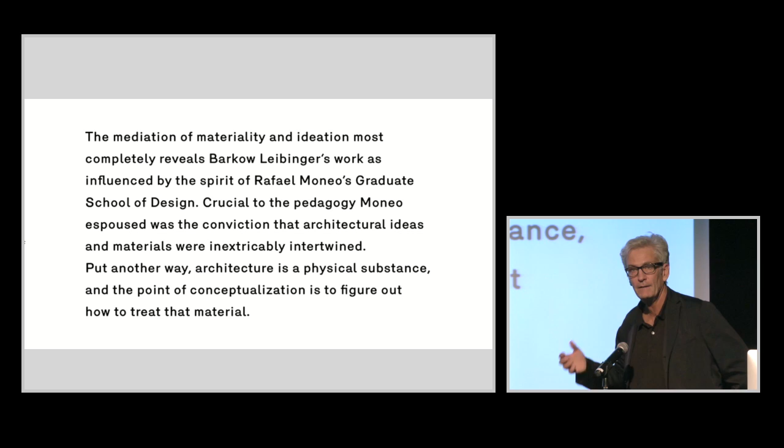One work area that Eric just mentioned was this idea of fabrication research, which we set up in the practice. It's an idea of materiality, but also an idea of the kind of components on our buildings that we develop ourselves. We don't really work with the building catalog so much — we build our own kinds of work areas or materials.

This idea of material, it's really not like a mantra in the office, but it was at the beginning, after coming out of graduate school with Regine at about the same time, a way of setting up the practice — a series of interests or concerns that helped us do that. So we were very interested in tools, how you can use tools.

You can use high-tech tools like this, or you can use a hammer. It really doesn't matter. It wasn't going to be like parametric design is going to take over the world or save the world. You can look at different kinds of tools and figure out how to use them.

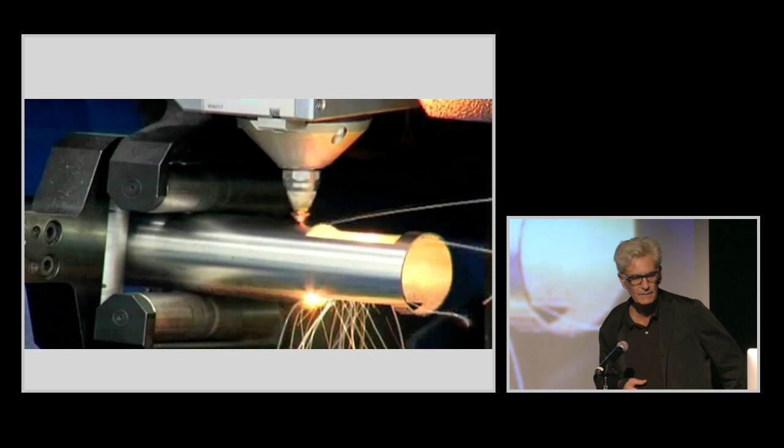Also looking at materials — when we came to Germany in the early 90s, a lot of our first projects were factories. We worked for industry, doing factories all over southern Germany. While working for these kinds of clients, we started to find out about their technologies, and became very keen on the idea of using their technologies for producing projects.

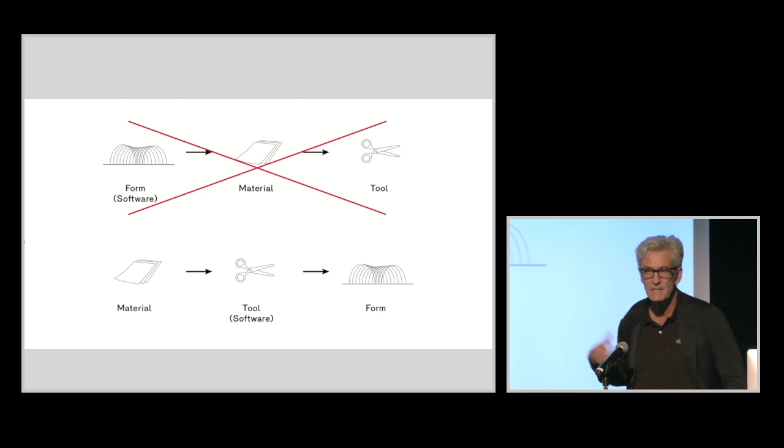When we were at school, the diagram on top might illustrate starting to use software to make forms, then thinking about materials somewhere down the line, and how you might transform the material through tooling. The way we'd like to work ideally in the office is almost the opposite — you take materials, you look at tools, software controlling those tools often, and what kind of spatial or formal outcome that might produce.

So a diagram like this could illustrate that idea of using tools and materials to produce again a kind of architectural outcome.

At the same time, we started collecting partners in industry in Europe specific to different kinds of materials, who were very keen or willing to work with us up front in terms of developing new ideas. Some of them are obvious partners from the building industries. Some, like BMW, are outside or parallel companies that would help us do these kinds of projects.

We also started making our own books, which you can do too — you probably do in school. We started making very quick, very cheap, almost like manuals to collect some of these ideas as process, not so much documenting single buildings we were doing, but talking about processes. Before we did the monograph this year, we did a number of these for the Architectural Association in London, cataloging these things.

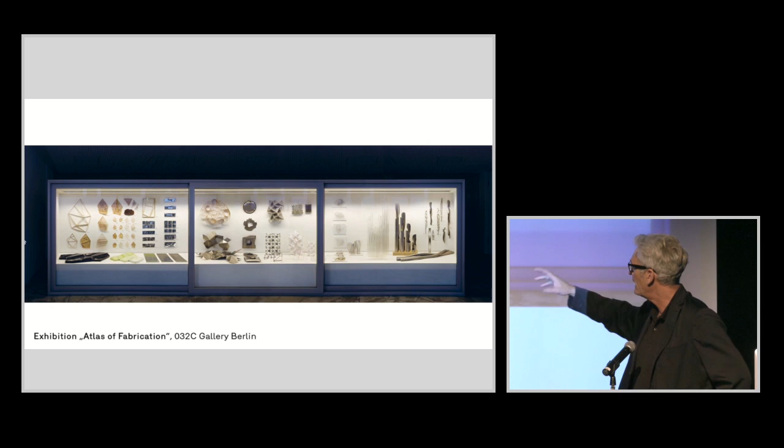We started making our own kinds of folios where we could collect different kinds of books and ideas, and distribute them within the office, as well as through the school. We also did exhibitions, almost like a kind of natural science exhibition, collecting different materials, some at different scales, some at the scale of 1 to 1, but really in a physical way, showing them again as kinds of collections.

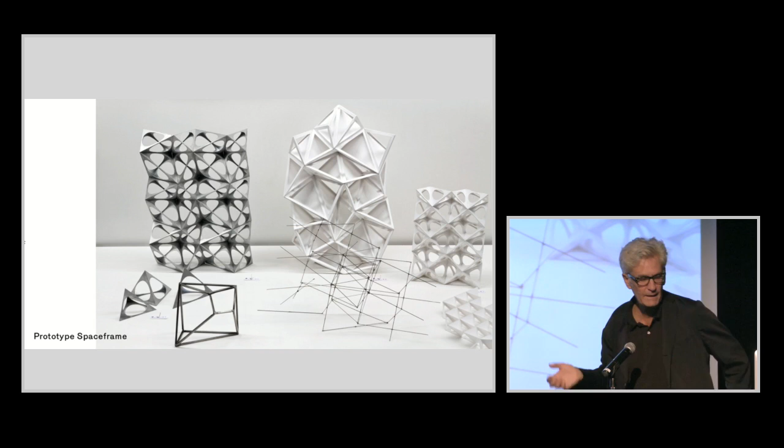We had this idea of an archive in our practice, using materials and ideas which you can add to, use or not use, almost like a library of different ideas. Some of these had a kind of history, like our interest in the history of space frames, how you could think about these digitally and produce these projects, then deploy them in our own architectural work.

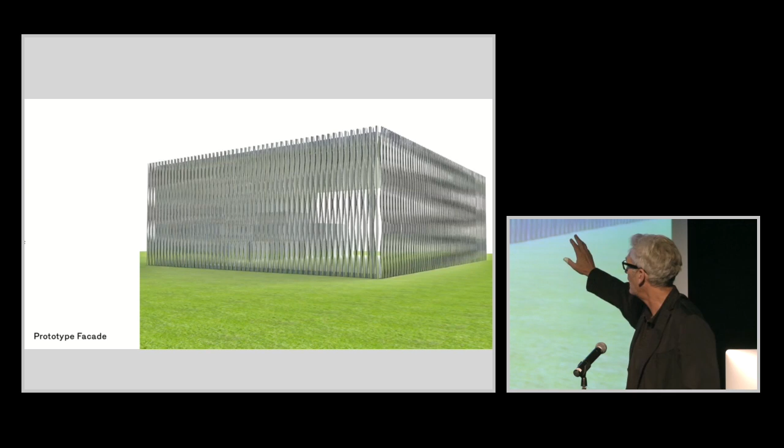We would send students down to the factories to find out about the economics, the speeds, the kinds of materials you could use. In a naive way we would just produce these things and cut them, thinking about an architectural application. We produced an array of laser cut tubes for an exhibition in Basel, Switzerland, which became an idea for a facade that could simply and kinetically turn these tubes to produce a formal, aesthetic effect, but also a performative one.

By turning these tubes, the showrooms could be transparent so you could see what was inside, or turning them could provide sun screening and sun protection. This idea of sustainability isn't simply something you tack onto the building, but something integrated and essential to the architectural idea of the project.

Around this time we were also working with installations and exhibitions. Architectural exhibitions really became about working toward this - we produced installations that were like a product, but also an environment, in this case with laser cut tubes that were scripted, so you could make one cut and produce a kind of tangent topographical project, again as a quasi-architectural project we could find an application for later.

There was also an interest in historical projects and revisiting them. In this case, Konrad Wachsmann, who had a strong history in Berlin in the 30s working in timber construction, and his development of the space frame, in this case for hangar projects - thinking about what that project would mean today.

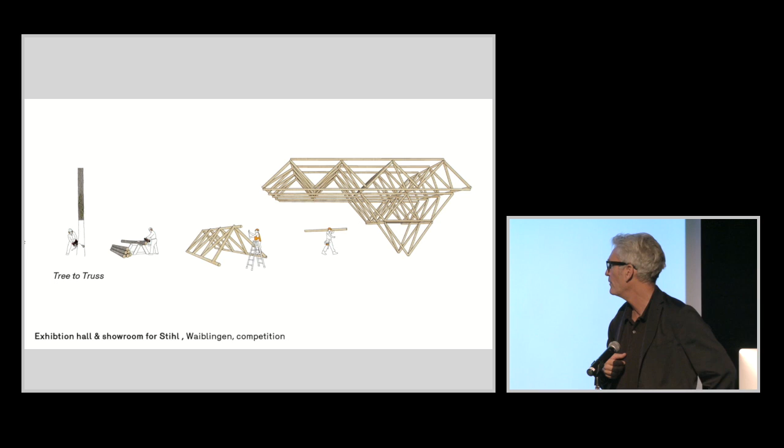We did a competition a few months ago for Stihl, a German company that makes chainsaws. They had their own forest, so they could harvest trees from it and cut them to produce trusses, which we could build into a large exhibition showroom for their products in this forest in southern Germany, next to an existing building for which we also designed a new facade.

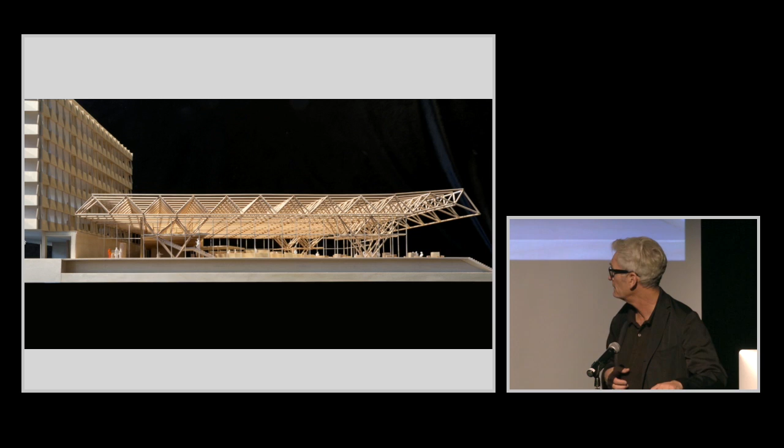We liked this idea of using the tools they produce, but then creating a Konrad Wachsmann-like space frame project in a really low-tech way, where you could literally cut these trees with a chainsaw and pin them together with bolts, constructing it very economically and quickly - producing a neutral, almost hangar-like space.

These kinds of projects were really close to the industrial projects we've been doing for the last 15 years, working for these Mittelstand, usually family-owned companies in southern Germany, to produce a project so simple in terms of detailing and process that you could almost build it yourself.

At the same time, this idea of tessellated structures and space frames informs a project still in process which we call Thicket. These are tiny structures made out of 2mm stainless steel wire that we just zip clip together.

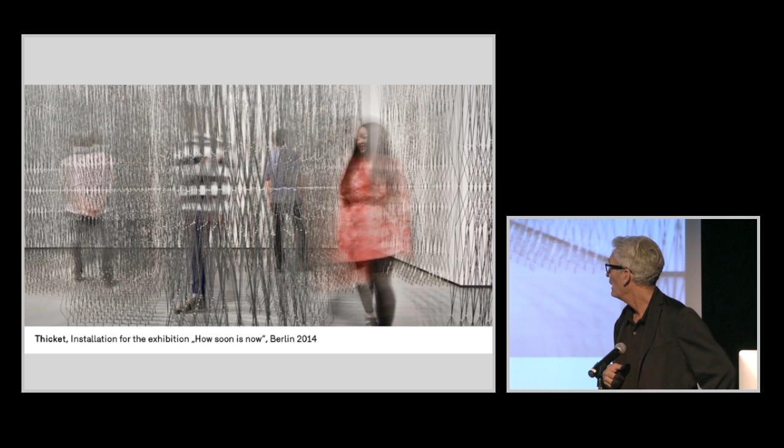The pieces were digitally bent by a company that usually makes things like coat hangers, to produce an almost labyrinth-like space, which we first showed in the exhibition How Soon Is Now, in Berlin.

We taught ourselves in a courtyard of our studios how to put these together. We made frames where you could assemble it, did some structural engineering calculations, and realized the project could take a roof of simple plywood. You could put it on the floor, almost like a domino-type diagram, as a kind of module.

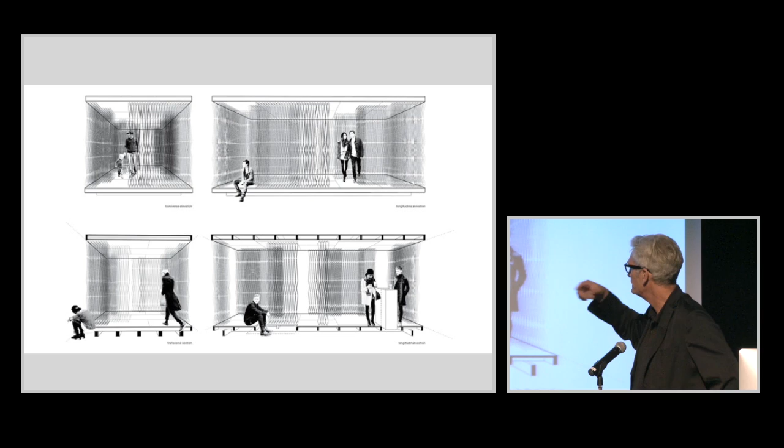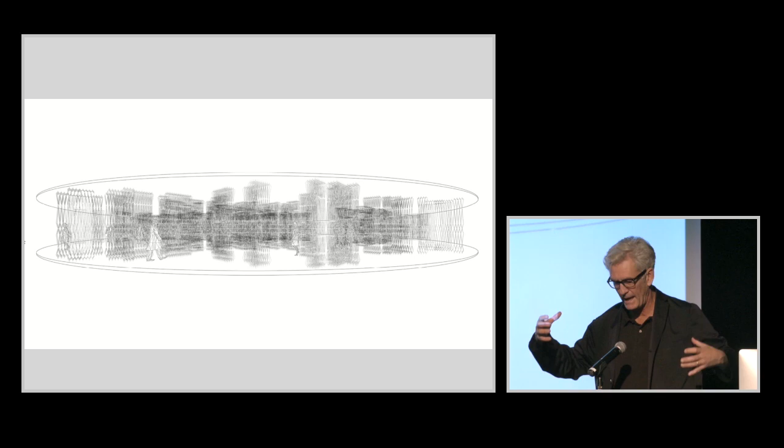The idea was that the structure itself would be almost completely dematerialized, like a blur. So if you put this pavilion in a landscape or park, you could see through it. The idea is that vertical structure, which is usually really heavy and physical, could be almost nothing, a blur-like structure that creates a kind of space. These are kind of think tank projects. There's no real client for a project like this, but we produce these things on our own initiative.

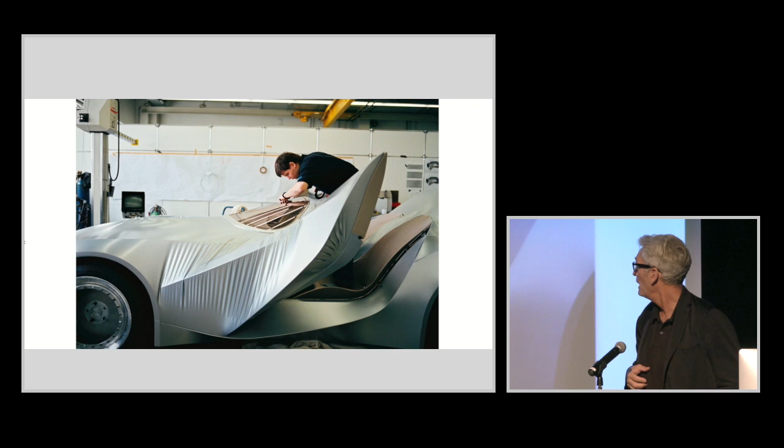Other projects are more collaborative, like the Gina project. We had won a competition for BMW in Munich for their design center. The project went on hold, but we kept working with Chris Bangle, who's American from Milwaukee and head of design at BMW. He had designed this really strange car called Gina, which has an elastic kinetic skin, so the car could change its shape, the doors, by folding apart instead of typical door mechanisms. We thought it was an okay idea for a car, but maybe even more interesting for architecture.

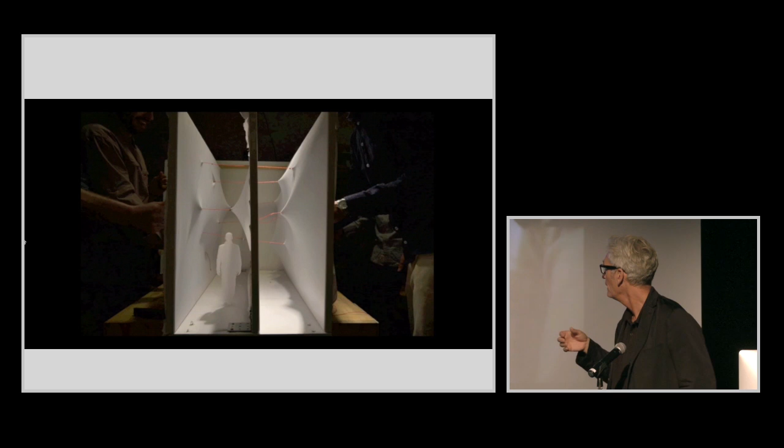Last year we did Rem Koolhaas's show on the elements of architecture in the Giardini in Venice. We did a wall - basically a kind of history of walls, from a very archaic stone wall, to a brick wall, acoustical partition, glass partition, to this kinetic wall project we did. We flew to Rotterdam to show Rem this sort of ridiculous film we made, almost like a puppet theater, of how it would work. Our interest and his interest was really how a kinetic surface could change the space between these layered walls, which was a very narrow space you could walk through. He really liked the idea, so we produced it in Venice.

This is Sejima kind of petting it, which is nice. It moved, and it also had a double layer of fabric that produced a kind of moire effect. You can see how it works spatially as a series of layers.

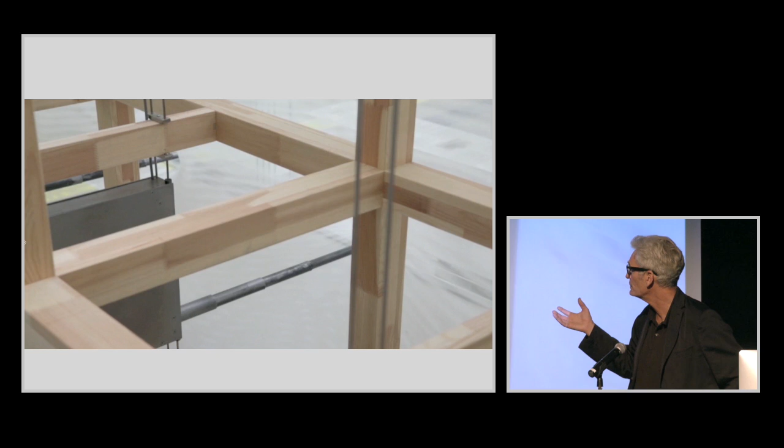It worked like this, so it was a little tongue-in-cheek really as an architectural idea. But we ran this as a studio at Harvard for lightweight housing, which was quite interesting, because you could have a kind of scaffolding structure - it could be metal or wood - and then a skin that was activated and changed. When we thought about this project programmatically, it was interesting that an idea of architecture could get smaller or bigger, could add, could be compact, with relatively little information or very little material.

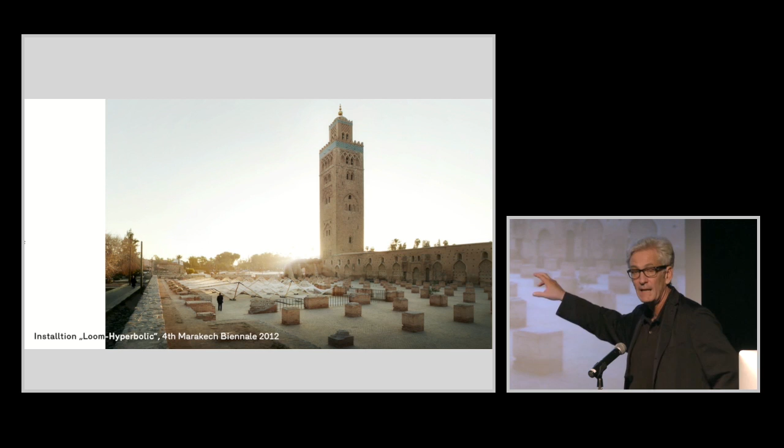A lot of these things we started to set up as prototypes rather than installations. This was an installation we did a couple years ago for Carson Chan in Marrakesh. Morocco has no museum of modern art, so the idea from Carson was to bring architecture and art into the public realm. We got this fantastic site at the Koutoubia Mosque in Marrakesh, where we could do a site-specific installation.

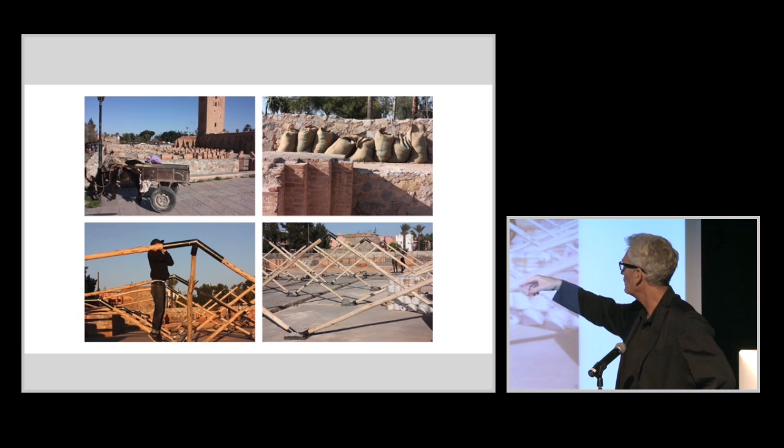The interesting thing was really translating this from a kind of digital world in Berlin to very much a craftsmanship world in Marrakesh. We brought all the material to the site with donkeys in these carts, and then had local fabricators make the metal connections and the wood for it, which let us do the whole project in two weeks.

Mohammed was the head of our construction team, and he had a lot of experience in traditional weaving techniques, knot tying and stuff. He was able to calibrate the project, tell us how long to do it, how we would do it—in a sense, interpreting the drawings and models that we brought on site.

So we were able to produce this project, which had, for us, an interesting material effect as a kind of test. It was very light in how it covered, how it worked in terms of shadow, and the light's very intense sun there. It fit within this 5 meter by 5 meter grid of the site, this abandoned, ruined site. It had a certain effect at night in terms of light and air.

Again, the idea of it as a site-specific installation, but we kept thinking about how this might translate to, say, an industrial architecture or at a different scale.

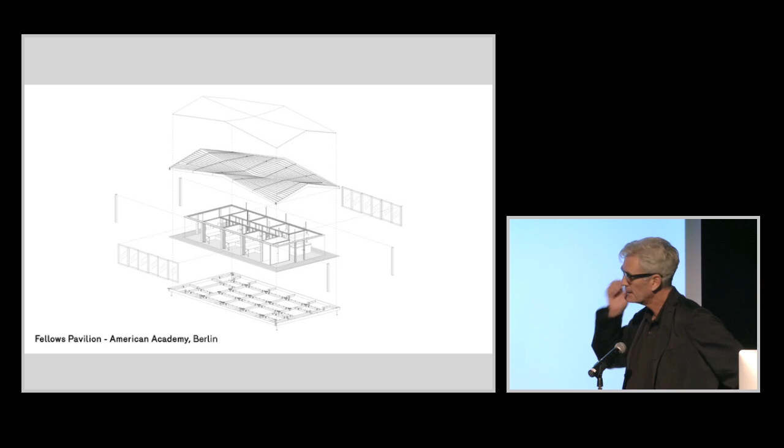In a way, that project informed this Fellows Pavilion, which we just finished a few months ago at the American Academy in Berlin, which used this idea of a hyperbolic roof—now not in string, but in steel—for these study carrels for the fellows, the scholars who come and work there.

The idea was to try to translate that kind of roof, or that form making, into a roof like this for the pavilion, which is quite simple. The plan has 7 study places, and in section this kind of insulated hyperbolic roof sits lightly above the ground on this platform.

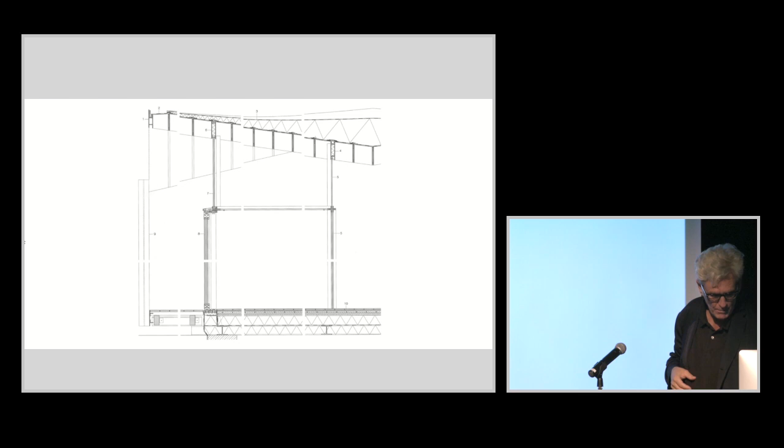We really got into the detailing of it—the glazing system, and then a series of prefabricated metal cassettes that fit together and could be insulated in a structure we could build quickly to produce these kinds of spaces, which can be very social, very open, or can curtain off and be private if you need more concentrated work within these kinds of spaces.

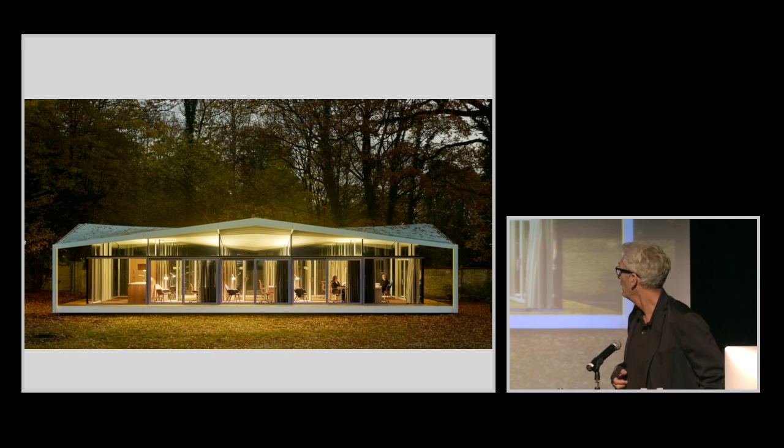It had a smaller garden site against the neighbor's wall versus a much more open garden side. These are former teachers of ours—Mark Wigley, Beatrice Colomina—came as the first scholars to work there. It was kind of nice to have your former teacher-critics occupying your building for the first time.

That again had roots to some of our industrial work, but the idea was to do a fairly highly experimental building for us at that scale and in that kind of context on the Wannsee. That's Beatrice modeling for us.

Another work area has been this idea of facade making. In a country like Berlin, there's a lot of industry focused on facades, new facade making—again, this idea of having a formal idea about a facade, but also the kind of performative, particularly with sustainability. How does it control energy? How does it control light and shadow, ventilation?

So it almost became, at some point, a kind of site within a site—this idea of a liminal space as a kind of mediator between our projects, which usually have a very public exterior and a very private interior. There were a number of projects coming out of the office at this time where that became the defining moment in the architectural project.

For example, the Gewandhaus in Dresden was a site for a new building for galleries, bistros, and offices. Dresden, as you know from history, was this beautiful Baroque sandstone city that was heavily damaged during World War II. In researching that project, there was never really any building done on that site since.

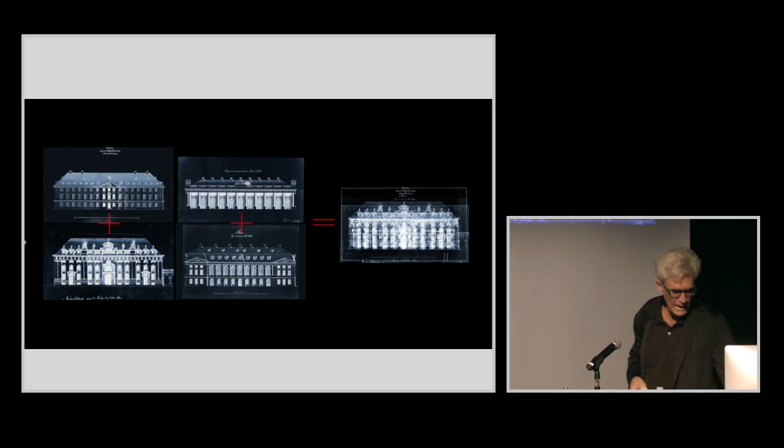It wasn't really an empty site through destruction—we looked at a series of buildings that were proposed for the site, and then we morphed them together to produce a form for the project. Then we went around Dresden mapping the surfaces of the Baroque architecture, which allowed us to produce an idea for a series of templates that we could stack and produce as the facade of the building, which could be in stone—the same stone, or it could be glass or concrete.

The idea was to produce almost a kind of historically accurate massing, but then with this kind of striated form that could be completely opaque, or completely translucent or transparent, depending on the time of day or how you would look through it. So for us, it would have a kind of depth to it also that was spatial.

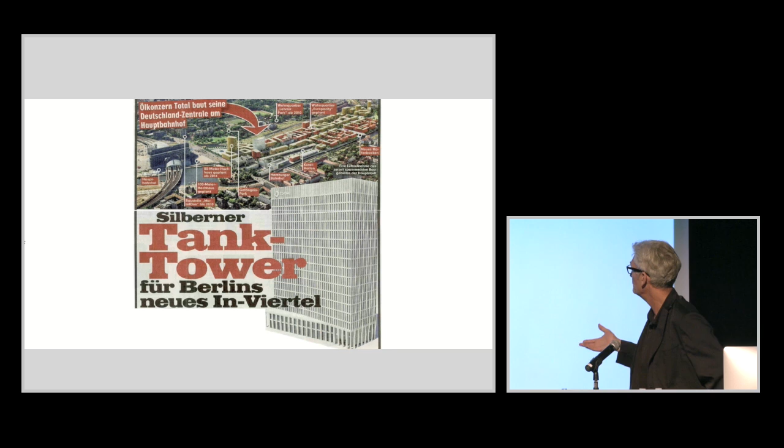It was Berlin, and even though we worked there, it was a new context for us. It got a lot of attention in the press because it was going to be the new project through there. So the idea was to think about the building in a historical way, this idea of a frame facade, a load-bearing facade. In the States we'd call it like a Chicago frame, but at the same time manipulate that facade formally so it had a certain dynamic, almost like origami.

It's a precast concrete, so it's load-bearing. We also have exterior sun protection screens, louvers there. The windows are operable, and it has a very good energy coefficient because there's a lot of closed surface. So again, this idea of combining a formal idea for the facade with how it would actually work.

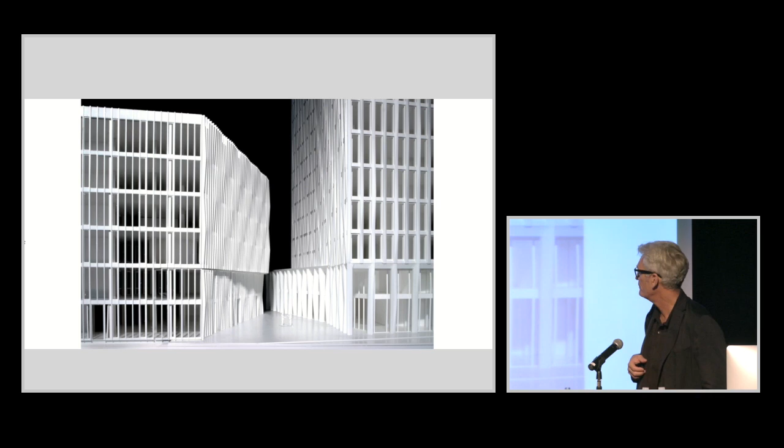We just completed the building on the left, which is a metal facade as a curtain wall. We detached the two buildings from what the master plan was thinking about, having them attached to create a kind of pedestrian space in between, a very European kind of space for going through there, but also a way of testing different types of facades.

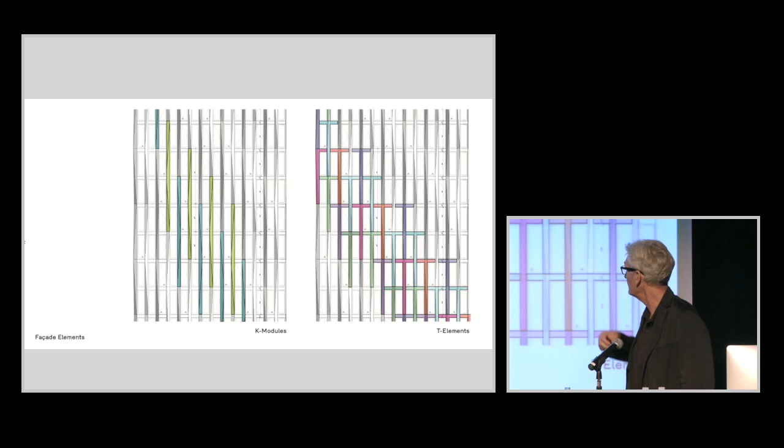In the plan you have this very tight grid of columns. Again, it's load-bearing systems for pretty much a column-free interior, for a kind of flexible office space. We created a system of T's that are interlocking, two stories high, that create the facade. On the left it shows how they are folded - they have this kind of origami structure.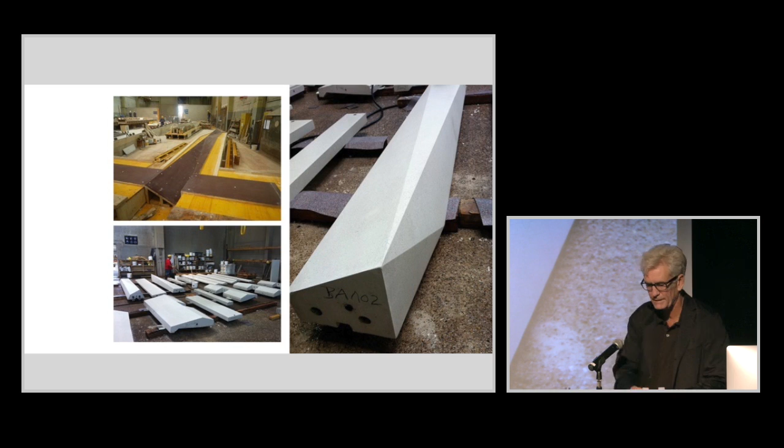Because of our fabrication know-how, we knew how to create more complex formwork for the concrete. And because of this digital world we live in now, we could produce up to 160 unique pieces for prefabricated concrete - prefabrication used to mean making the same thing over and over, and now you can make them very unique. So it's almost like a historical project that we could go back to digitally to produce a more complex facade, with a kind of spatial depth on the outside or inside.

So completely different than, say, the World Trade Center, which is just these kind of innocuous, almost glass facades, which in Europe would be considered not a very good energy facade, not really a contemporary way to deal with a skin. So we developed the facade, we developed tile.

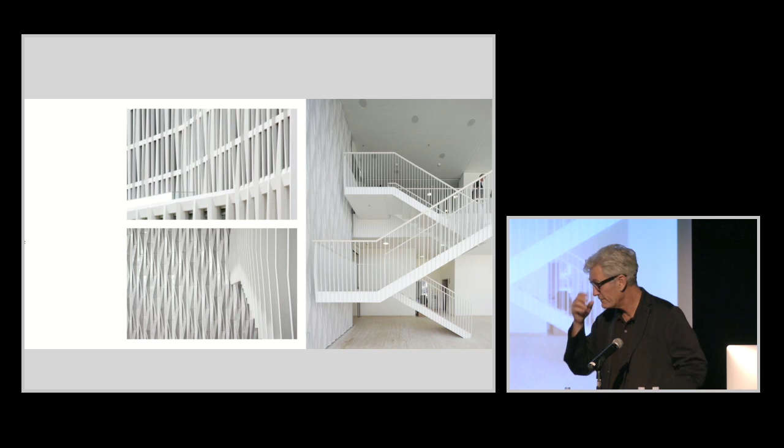In the States there's a long history of terracotta tile. We could find local producers who would make a unique tile for us for the building, so we could control different work areas within a kind of core and shell building like this.

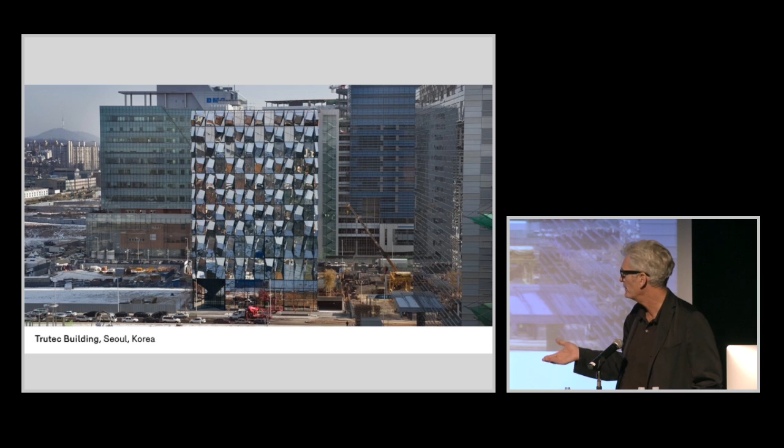A little bit earlier, we had a completely different tack for the Trutec building in Seoul, Korea. There was no context for us to react to - it was like a tech park being built literally overnight. We'd never been to Korea, we had no idea what to react to.

So in a way, in this case, the facade really began to be something to mediate whatever that context would be. We came up with this idea of making a facade that would be like a kaleidoscope with a couple of different elements that would have a visual effect in that space.

When we were in school in Boston, we were always fascinated by buildings like Harry Cobb's Hancock building next to Trinity Church, which was this attempt to make a perfectly flat reflective glass facade, which of course is impossible - there's always a little bit of distortion in that surface. So rather than that being a deficit, we wanted to think about that as a kind of positive thing.

So we started producing one-to-one mock-ups in the courtyard of our studios, and realized with a very flat surface you could produce an amazing visual effect through this kind of faceting. So we started doing drawings, looking at different patterns, looking at the limits of glass size.

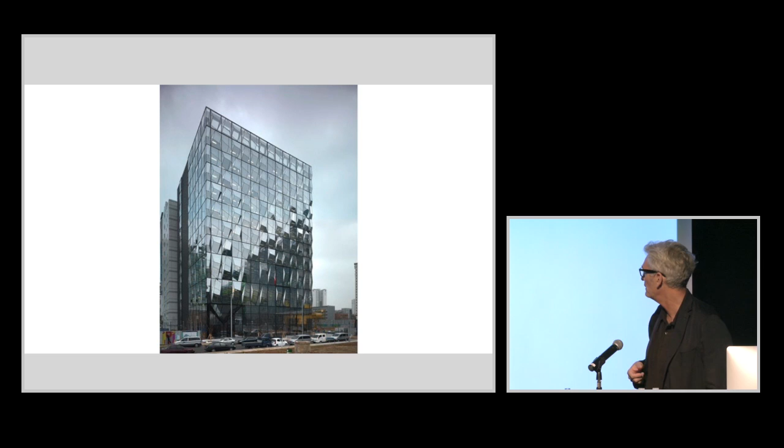The glass came from Minneapolis. The facade fabricator was in Seoul to produce a kind of unique facade for this. So we had two modules: one which was three-dimensional, which we could turn upside down to make a different one, and then a flat one, which was also more economical to produce a fairly complex facade. We made larger models in our workshop in the office to figure out how the joints could work and how this thing could fit together.

So it wasn't really about celebrating the joint or something like that, but really more about the visual effect of the surface. But you can see in the section drawing how flat that is. It's only about 20 centimeters deep that all of that works in.

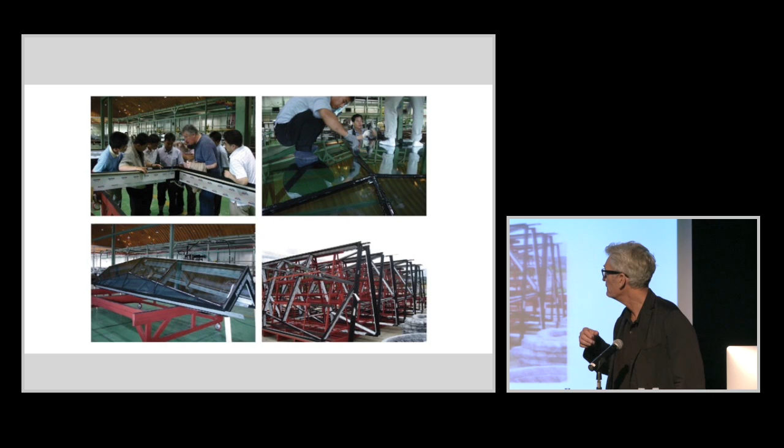We worked with collaborators at ARPS in Hong Kong. Jerry would go there and run workshops with these guys, and they could produce really complex pieces. CNC cutting the things and then doing the joints by hand, a mix of high tech and low tech technologies. We made a mock-up and blasted it with water and rain to see if it would work, and then we were able to go into production.

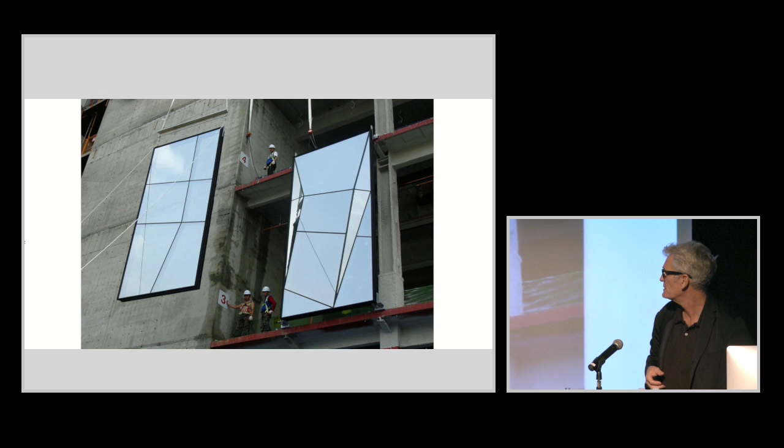This is really the time I think we became aware that you could actually produce your own facade systems, your own components, test them, and then put them into production. At the time, for us this was a very unique idea for doing a facade in a completely different building culture. Again, this is a facade that wouldn't have been allowed to be done in Berlin. It would have been too expensive, and it wouldn't have been allowed through the zoning. But this idea of being able to show up and produce something really unique, but in relationship to the place we were working, led us to produce this facade.

The window cleaners are insane.

Which was really exciting for us, as we started to work more internationally and in different places around the world, and to look at the facade as something that could be completely reflective. It reacts to the weather or people driving by. The LED advertising across the street, it becomes transparent at night.

It was stolen by Chanel a couple weeks ago. And they said that we stole it from them, but I said just look at the calendar. So, I guess imitation is the most sincere form of flattery.

And again, we designed certain areas, the lobbies we did, in these kind of loft-like spaces, very simple, to have this kind of lattice-like space through that.

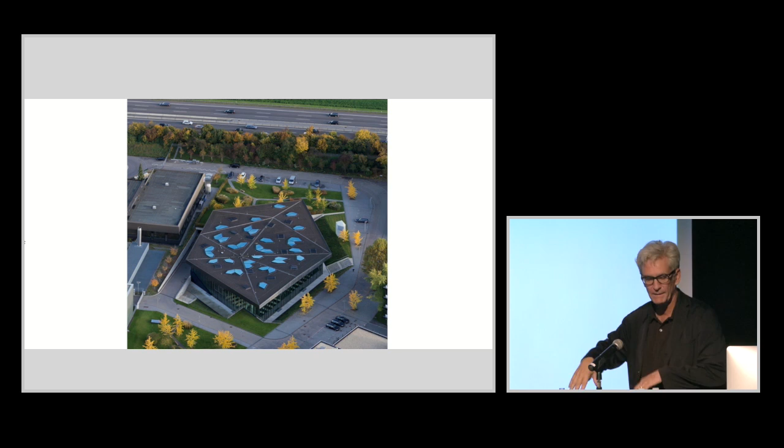A cantina is kind of where everyone meets, like a cafeteria, and usually these are terrible spaces in the basement of these companies. But we were able to think about it a little differently, like an event space. You could have parties there, or musical events, lectures.

Factories are something that are always being built. They're like infinite cities, you're always adding on to them. So this is really like a one-off, like a pavilion type of project.

Working with students, we did different models. Some started with wood, some with concrete, some with steel construction, to see what kind of structure that would produce.

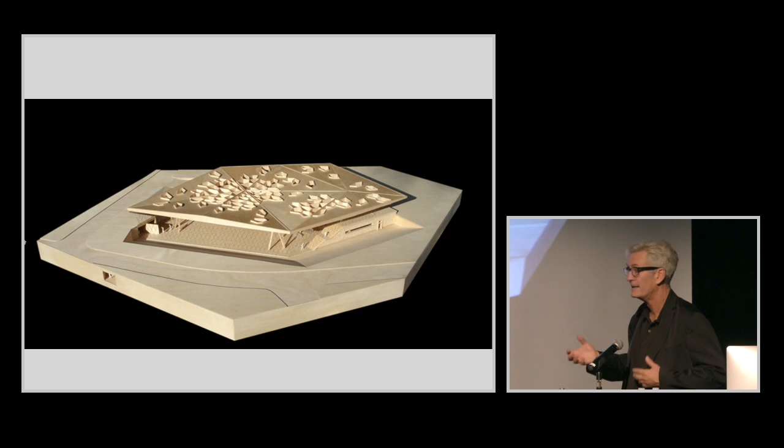So what we did is we made an excavation, like an amphitheater. The hole on the left is a tunnel. The whole campus is connected by tunnels, and then in a way this leaf-like structure covers the excavation to produce this flexible slot space, and above this produces a mezzanine space that defines the space.

So we got the project going. We got to the Black Forest and met these guys called Amann. They were doing digital construction, timber structure, CNC machines. We were down there with their drawings. Klaus is cutting everything in the computer.

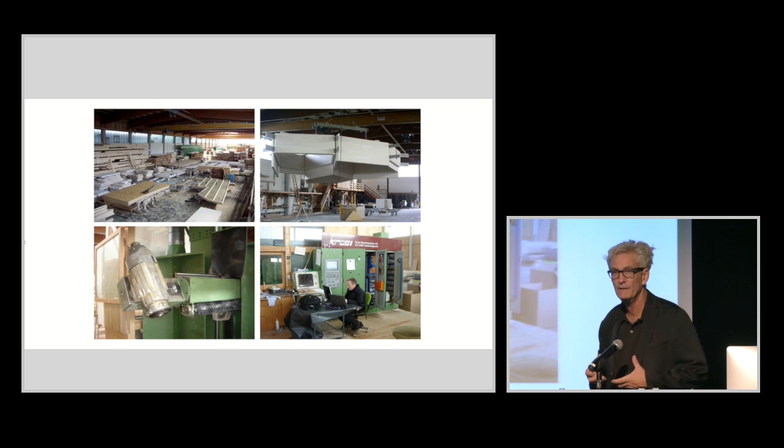They set up these amazing production runs where we could cut hundreds and hundreds of pieces, each one unique. In the upper right, we produced a mock-up which showed the joints and the finishes. We ended up going directly into the building, so this thing is going up.

We combined the timber construction with steel, so we could get much wider spans and also flatten the section—the roof wouldn't have to be so deep. And then produce these plans with column groups that could be relatively open and flexible.

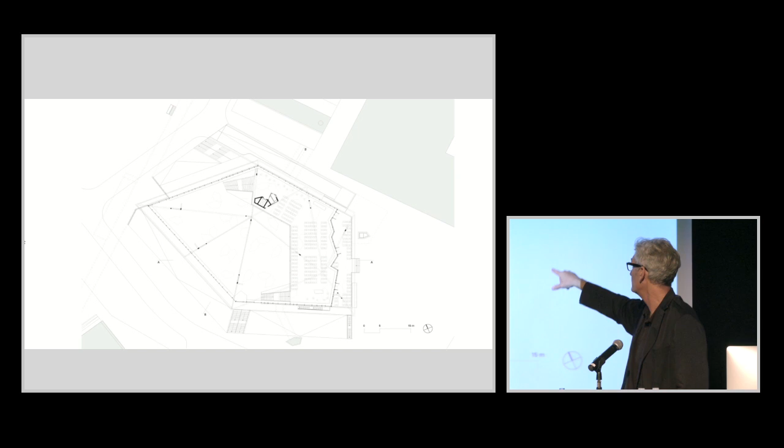By putting the building partially underground, you could create this mezzanine space, which they used right away.

A kind of programming of the cells produces a honeycomb structure. Some of the cells could be skylights, some acoustical panels, some artificial lighting—there was a logic in terms of where daylighting could be, or acoustical panels, so it had a formal idea, but all of these things had a functional aspect.

So really, compared to this facade project, we didn't care about the building so much as an object, but really about creating the space.

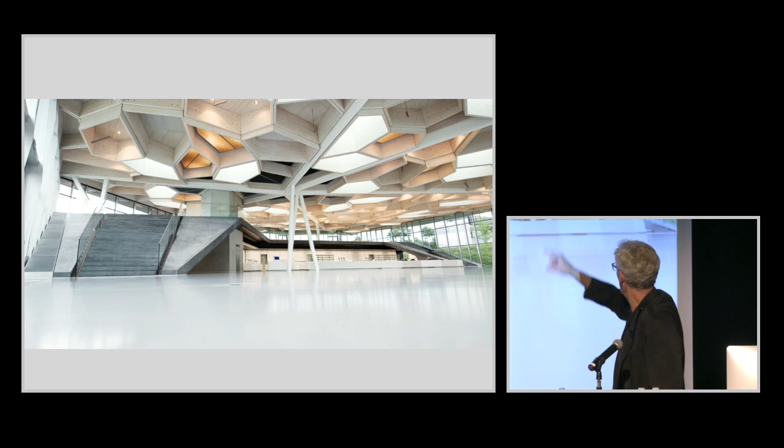The ground is there, and we created—it was the first time we created everything: these precast stairs, a kind of tessellated tile in the back, and these cells through the CNC cut pieces.

We could invent all the building systems, including the mechanical systems, integrated into a flexible social space for blue-collar workers, white-collar workers, clients, and visitors of this high-tech company in Germany—and produce a porch-like space that opened out to a garden they built, again in an industrial campus.

We were huge fans of architects like Albert Kahn, who did all the buildings for Ford back in the 20s and 30s—this idea of revitalizing industrial architecture in a place like southern Germany, where Germans still make lots of things: products, cars, machines, machine tools.

The other project we did at the same time, also with Werner Sobek the structural engineer, was a gatehouse that uses their technology. We went back and looked at projects like Jean Prouvé's in Paris from the 50s, where he used sheet metal to produce structural systems, furniture systems, and glazing systems.

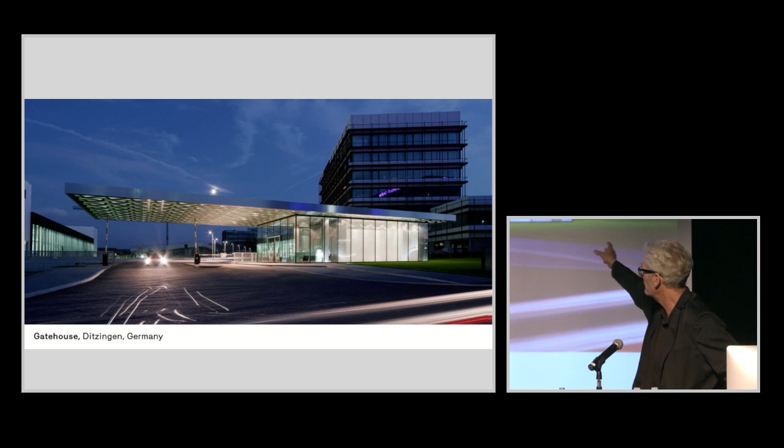Working with Werner, he wanted to do this cantilever building—it cantilevers about 20 meters past this glass enclosure to produce an information center or gatehouse. We knew these guys made laser-cut and welded decks—could be a deck for a ship or a table—in a way, scalable elements.

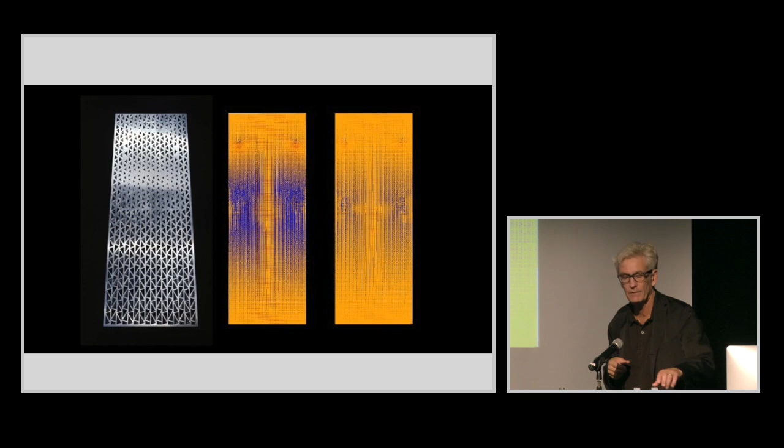We inherited these loading diagrams from Werner and started building our own models at 1 to 50 scale, using the same technology we'd use on the building at 1 to 1. We created this variable section that relates to the structural loading.

We produced a mock-up of how the gutter fits in, the detailing, welding, bolting. Then we brought this thing on site, all prefabricated, lifted it with cranes onto these four columns, and dropped it into place.

So this is the building, which also acts like a kind of lantern or marker for the entrance. We were able to light the entire roof and create a curtain wall glass facade entirely made out of glass.

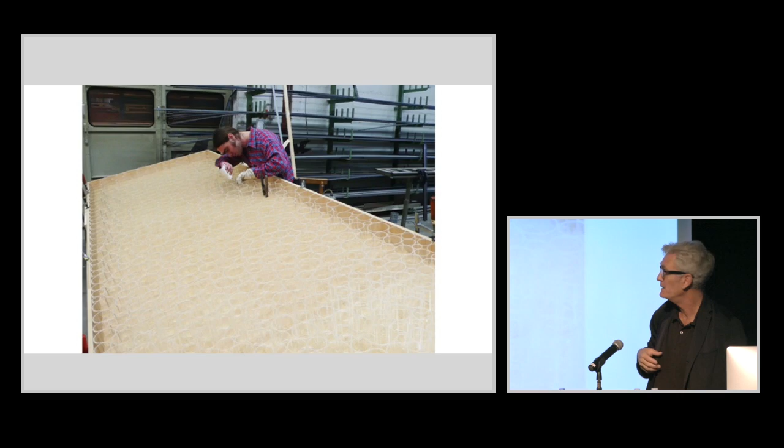It's a double facade that we filled with tubes that also act as a kind of sunscreen for the space—again, digitally cut stuff, but also guys that would come in and produce this by hand.

So the facade was quite cool because the vertical posts are laminated acrylic. So in a way, either float glass or acrylic glass, it's entirely made out of glass. So the whole facade is either transparent or translucent because of that structural making.

Then we created a kind of gasket detail at the top of the glass, because if it snows 2 meters, the roof has to deflect without destroying or crashing the relatively delicate glass facade.

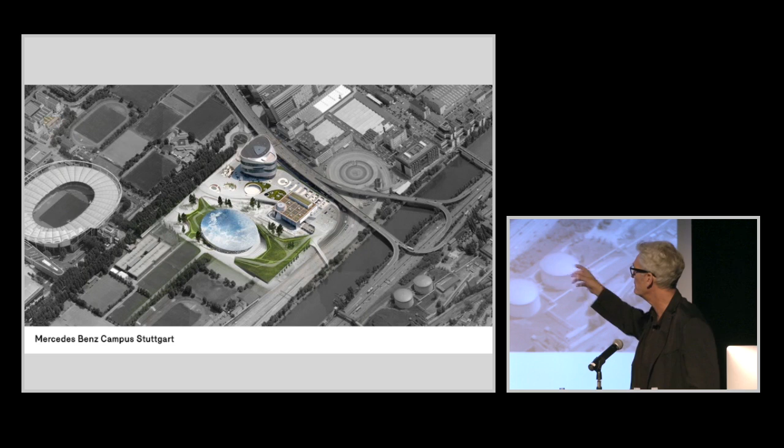Another project about that time, a little later and down the street from Mercedes-Benz, Daimler, was a museum for the future of mobility. They didn't know what that was going to be, so they wanted something flexible. The museum on top is Ben van Berkel's historical museum for Mercedes-Benz, and then a kind of sales outlet in this landscape, surrounded by rivers, a stadium, and a giant test track for their cars.

So we wanted a very strong structural idea for it. But we started like this, just getting veneer wood and getting it wet, and we made CNC cut frames and started looping it and folding it.

It had a kind of ornamental capacity, but the idea was to translate those models into a 9 by 9 meter grid that would be the structure over that whole oval-shaped roof. So these would translate to steel.

The loops would be hollow. We'd fill them with water, so the loops could be, in a way, like a radiator — it could be the heating, it could be the cooling for the space. You could also have natural light moving through it. So again, this kind of all-in-one, multitasking idea.

Like some of these other projects, we tested the roof idea at a different scale, at an exhibition installation scale in this gallery close to our offices, with the idea of translating it at a much different scale — the scale of this huge oval-shaped roof, which would enclose their Museum of the Future.

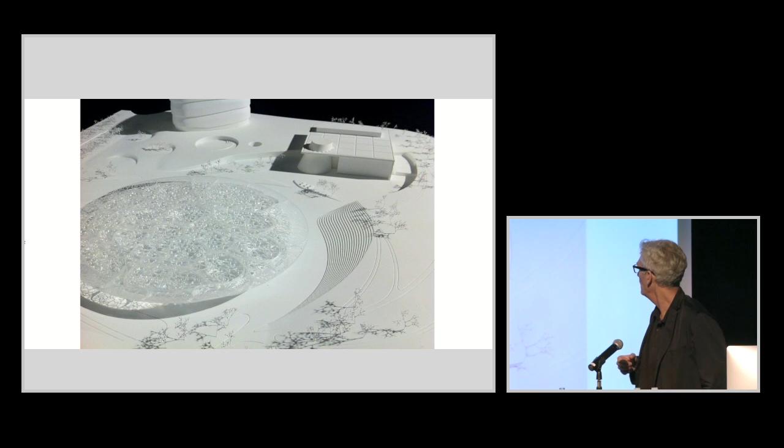And then it's bracketed by two pieces. On the right is a landscape — that's where all their workshops are for fixing some of their old cars. And on the other side, a parking lot.

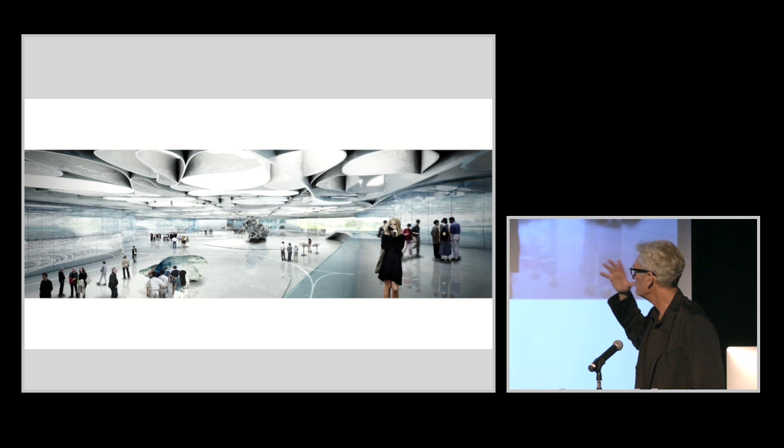But this looping for us was an idea about visual movement or mobility that could also loop and drop down to produce a series of spaces where they could have auditoriums — so this is like the auditorium space for their cars, a much lower space versus more open spaces like this, where they could have displays of ideas for new mobility concepts.

And then a certain transparency of the building opening up out to the park and to the Neckar River. So for us, these were really ideas about the structure somehow determining it, or that idea of an all-in-one where the architectural idea and the structural idea are so closely interrelated.

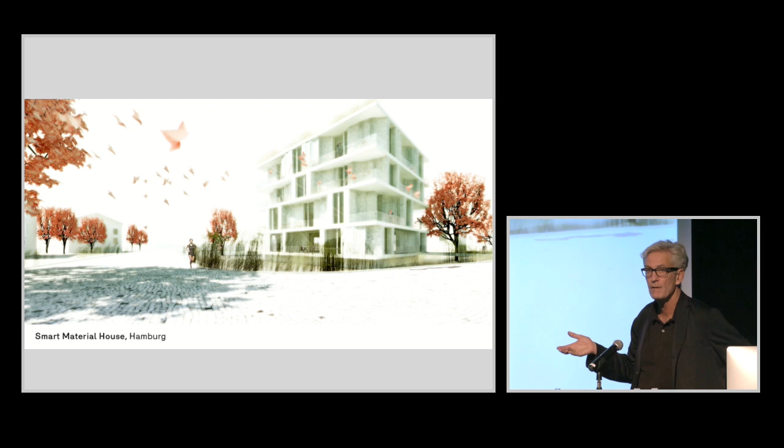The Smart Material House, this has been an ongoing project for the last 5 years. It started when we won a competition in Hamburg for the IBA, the International Building Exhibition, which has been around Germany for like 80 years, where it was an idea about affordable housing, experimental housing. In Berlin there's been many cycles of this idea.

So we started with the idea of smart materials, and we were like, well, what are smart materials? We didn't want to get stuck in the cliché of tech materials or something like this. In a way there was a discipline in this project, probably the purest one, where we sat down with Matthias Schuler, our energy engineer, and Mike Schlaich, structural engineer, and they said, let's just pick some materials and see what kind of project it would produce.

So we picked infralight concrete on the left, which is self-insulated concrete, with an aggregate like clay or recycled foam glass. It's really light — like a third the weight of concrete. If you put that piece in a bathtub, it would float. And then on the right, wood timber for the floors of the building, which in this case was 4 stories of flats.

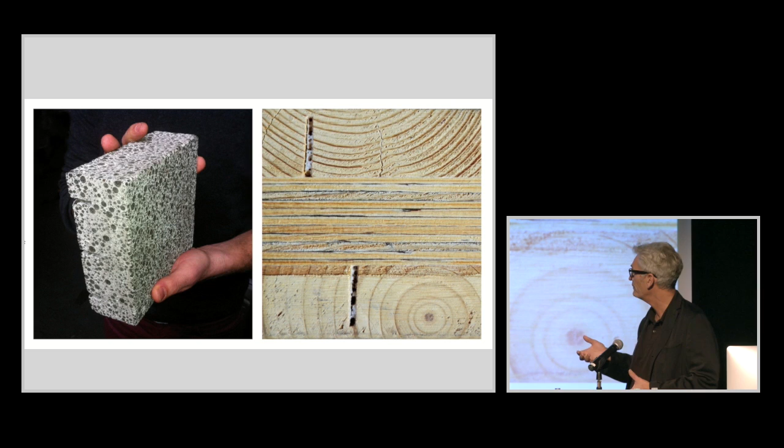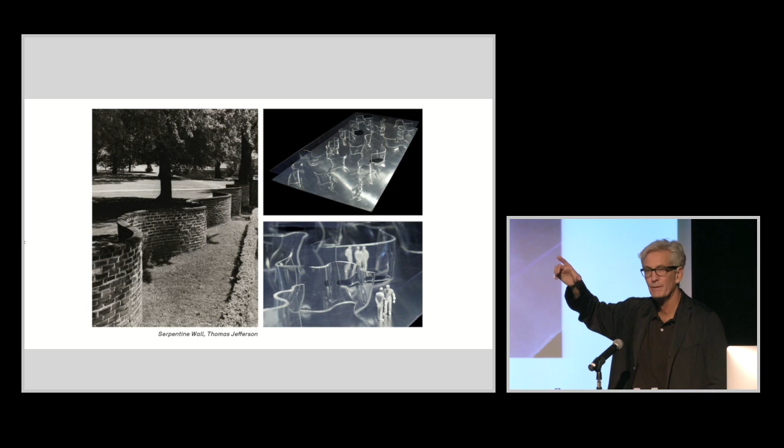And then we looked at some of our earlier experiments. We love things like Jefferson's serpentine walls—it's like one brick thick, and by making it serpentine, it's really strong and self-supporting. We had earlier experiments with this so-called squiggle wall thing, where you put those squiggle walls in, which makes it really stable, almost like a gigantic box beam that could then be almost column-free underneath it.

And then we created this element—again, this idea of a kind of multitasking element, where all the energy, solar absorption, heating, cooling, would be embedded in a piece that for us was really sculptural and spatially very specific. So rather than the sustainability stuff being tacked on, it would be one and the same. A lot of that is hidden in the material thickness of this thing, but it would produce a prototype or element we could combine in different ways.

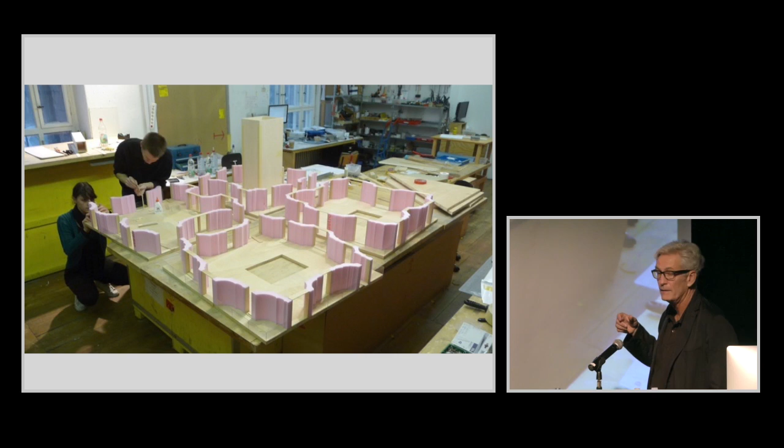Like some of these other projects, with the students we produced really big models out of pink foam with a hot knife that we could produce really quickly and then test them. They were really strong, really stable. And then to check the scale of it—for us it was important that this would be housing, so it has a kind of domestic scale, a scale that relates to your body.

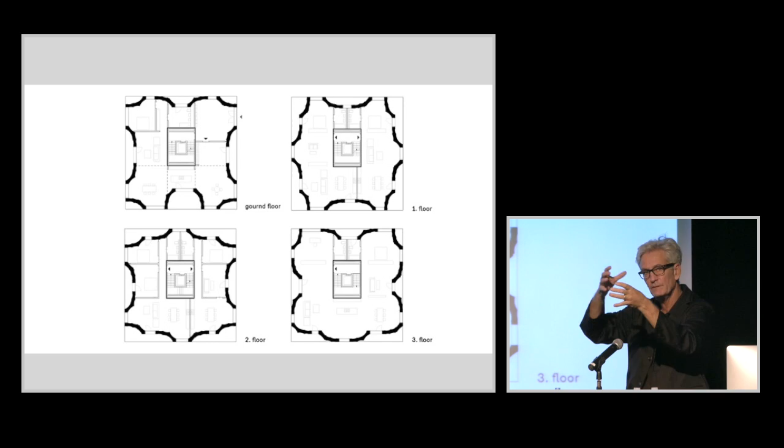So these could be prefabricated and then combined with wooden windows. And because it's self-insulated, each floor plan could be slightly different. So if you imagined these floor plates stacked on each other, the walls could overlap like this, like a house of cards, and it would still be really stable. It wouldn't fold down, and you wouldn't have cold bridges or those kinds of energy problems.

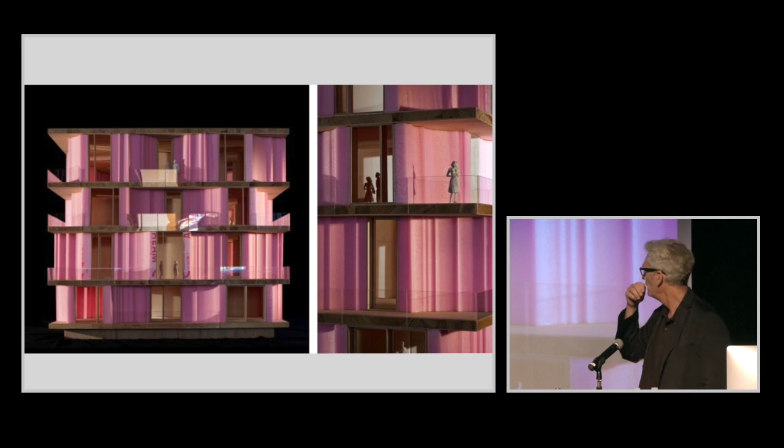And the floor plans on a 9 square grid can be really open, like a loft, or they can be broken in—if you want little rooms and bedrooms, you could break it up and put room dividers in. But to produce a spatial condition like this, we have very soft light filtering in through this deep wall section, which produces a very sculptural wall, but also one that was reversible. It would produce interior spaces, but also produce, through this scalloping, little pocket spaces or balcony spaces on the side. Like a bit in the Korean project, through one or two different types, you could turn them upside down.

The inside is the same as the outside, producing a fairly complex wall section, like it shows on the left, or in the corner detail over here.

So we put this project out, we published it, and we won a prize from Holcim, the Swiss concrete company, because they want to find new ways to use concrete. That allowed us enough money to build a kind of scientific prototype. So we made this in the factory—this is the aggregate, made again with formwork out of our digital work, to produce a prototype that we could test finishes on, different ways of sandblasting or sanding it, testing how much loading capacity it had, what it would look like, how much it weighed, all this stuff.

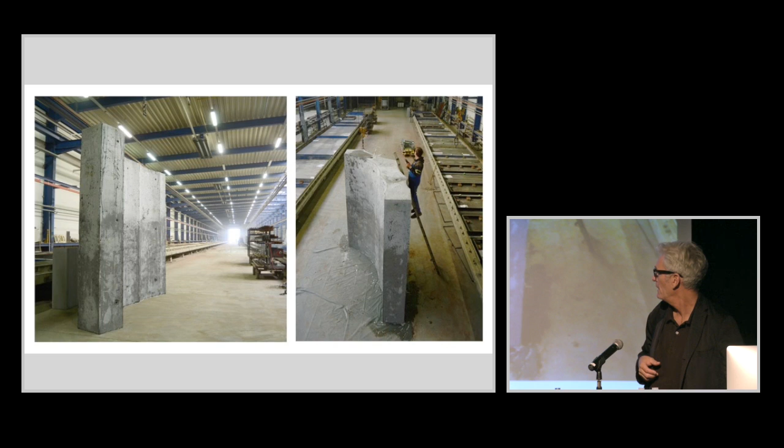So in terms of setting it up—in the meantime, there's this housing crisis in Berlin. Before, it already switched to housing. Berlin used to be a shrinking city; now it's a growing city. So there was this demand for housing, which has become even more extreme in the last three or four months, with up to 800,000 refugees coming into Germany this year alone, representing 1% of the whole population, with the possibility of 500,000 more next year, and 500,000 more the year after.

So this idea of Merkel as Mother Teresa—and how do you deal with this dilemma? You have lots of empty housing in East Germany but no jobs, and lots of jobs in the West and South but no housing. So how do you produce housing? A lot of housing right now is temporary, and some of our buildings are also being appropriated for temporary housing. But how do you produce economical housing in the next few years?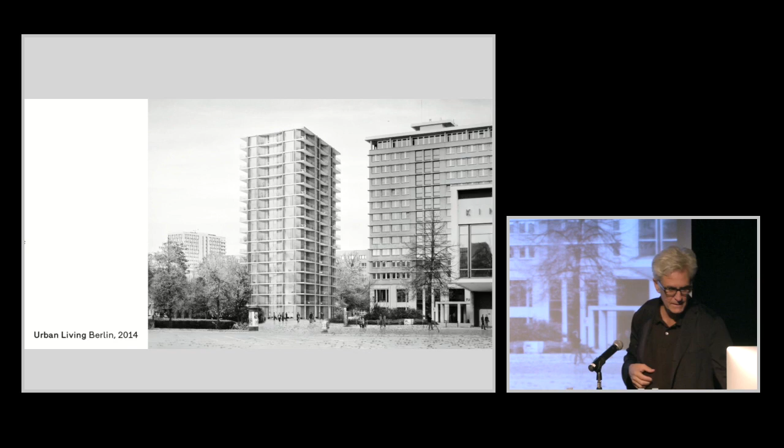So one of the ideas was to take the smart materials point tower idea, now as a kind of extruded tower. Karl Marx Allee is the place we're testing it—it was like the East German showcase, where they'd drive the tanks up and down, built with these Plattenbau, the Soviet-style precast, prefabricated modular housing.

This is Khrushchev in '57, looking at an exhibition in Moscow. This housing is everywhere—it's in Berlin, it's in Eastern Europe, all over the place.

We liked the idea of the production idea that you could use this material again, but in a kind of up-to-date, smart way.

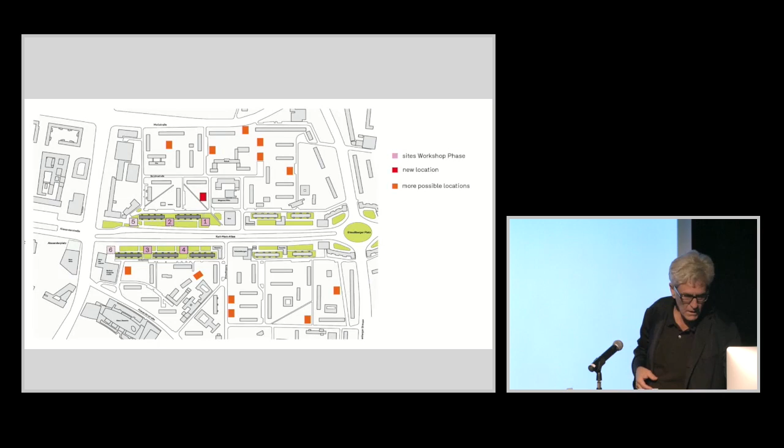So this is the first tower we looked at as a drop-in—we had this conversation last night at CCA—but how do you add density in a city, especially like Berlin, which is so heterogeneous? Every neighborhood is different. We were looking at these eastern neighborhoods, which are dense but not that dense. It was quite easy to add hundreds and hundreds of units of housing in different sites, almost like a prototype. We could drop these things in without disrupting existing neighborhoods in terms of light, air, shadow, setbacks.

So in a way, all of these are legitimate sites for building towers at slightly different heights. This was an interesting, up-to-date adaptation of that earlier project.

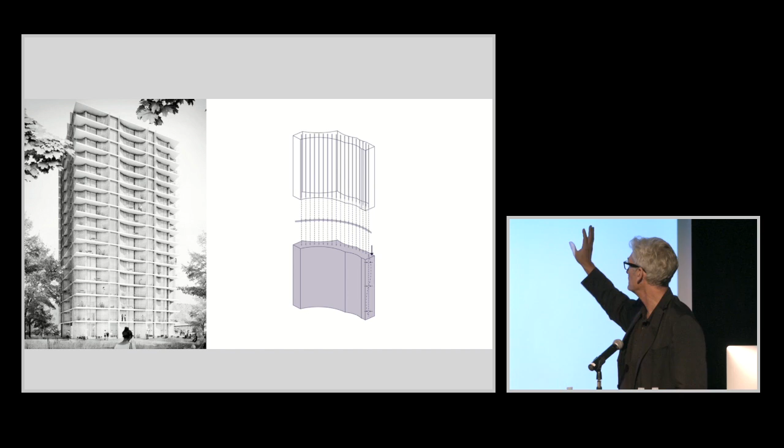Structurally it works a little bit differently. The steel is the vertical structure. The infralight concrete now is like the fire protection—it stiffens the steel, it's the insulation. Again, three things to produce a kind of housing, like the example on the left, that would produce similar units with balconies on the outside of the lofts and the inside.

So in a way, it's like the opposite of these super thin, super tall residential high-rises in New York, where the apartments are like $100 million each. These could be really, really cheap—30, 40 square meters—for a kind of flexible, loft-like space, or a more partitioned space as you want it.

This other area I've been working on—we did a studio, a GSD studio in the spring on housing, and also with Lacaton & Vassal involved in our symposium—is this idea of reuse of buildings.

We're constantly doing reuse of buildings, sometimes our own, sometimes other buildings—this idea of makeovers. How do you transform buildings? Usually a makeover isn't about restoring something to its original use or condition, but somehow superseding it programmatically. This project, Biosphere, which we did about 15 years ago—

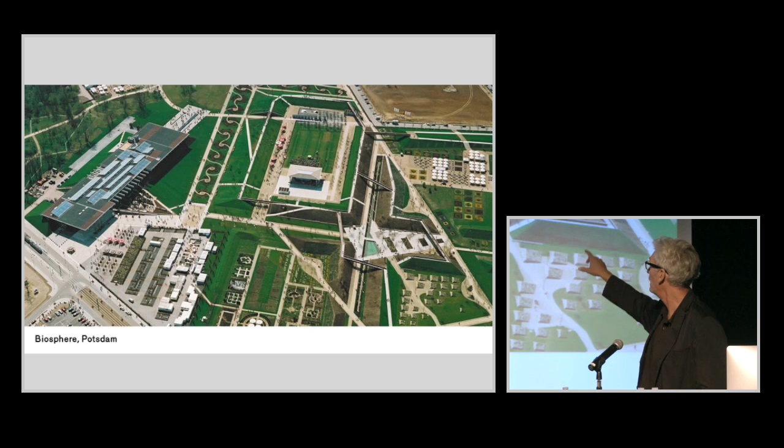this was a post-military site. The Soviets built berms to protect their barracks. That was transformed into a public park. We did a pavilion for the German garden show that was like a giant sort of land art building that created this kind of greenhouse space.

So this building's already gone from a kind of exhibition pavilion to a kind of attraction, to the third makeover, which would be a school. We're inserting boxes into the space to provide classrooms and spaces on the roofs for the children. The building has also been temporarily used for refugees—they can stay in a large sort of orangerie at the end of the building.

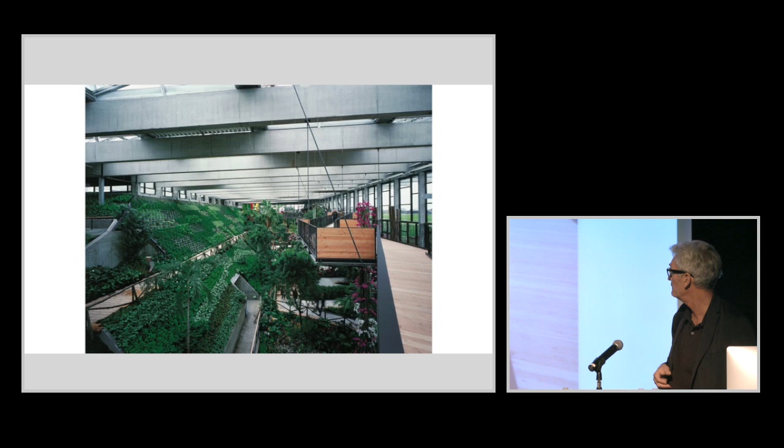But the idea is somehow going from keeping this condition as a kind of interior landscape, where you're moving around on these oblique surfaces, to one where you could fill it in with classrooms that could be acoustically private. The classrooms can also have a different kind of climate—they could be warmer or a little bit colder in summer or winter, using the old space. It's interesting that we've been doing this long enough that we actually come back to rethink our own kinds of projects.

There was a history in West Berlin of how, again, density—how do you use existing structures, how do you add density in the building. Schlangenbader Straße was a famous example of building residential housing over the Autobahn in Berlin.

This is West Berlin—again, when it was an island city, isolated from the rest of the country. But this was an incredibly interesting example where you could connect neighborhoods across the Autobahn, but also generate dwellings on top of it.

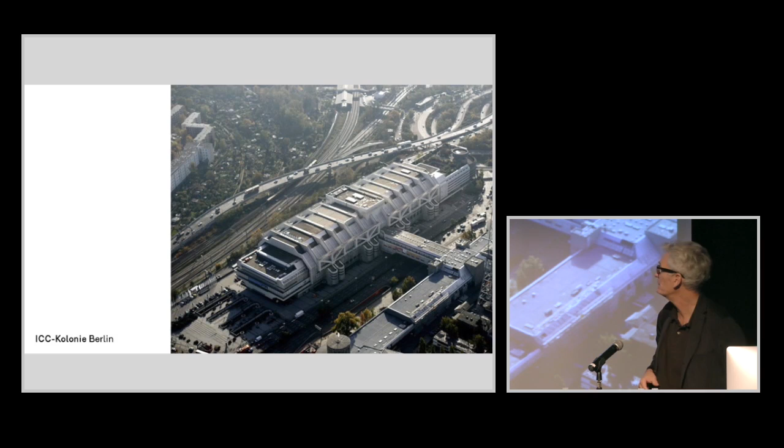So we found, through an invitation from the local newspaper, to look at the ICC from the '70s, which was a megastructure. It was two students from Prouvé's office who produced this thing as a Congress center. It was abandoned recently, so there was an initiative to find reuses for the space.

Our idea was to put housing in—very simple, almost kind of prefabricated container housing—and create that space as a kind of park or interior space that could have a roof that would control the weather.

The roof could open up like a convertible to let sun and light into the space, to create affordable housing in a space like this—a kind of pre-existing gigantic interior within the city—rather than simply building more and more out to the suburbs, but really trying to find ways of diverse program and different uses within the city.

The last group—and I think these are examples of housing also—but site-specific talks about how you react, or how the site somehow informs the architecture that we do. This is an idea that comes from art, from land art and projects like this: how does the site generate the project? There's a lot of interest in the idea, the ambition for self-generating projects—how do you generate a project rather than just dropping things into the world, but how do conditions of site inform that?

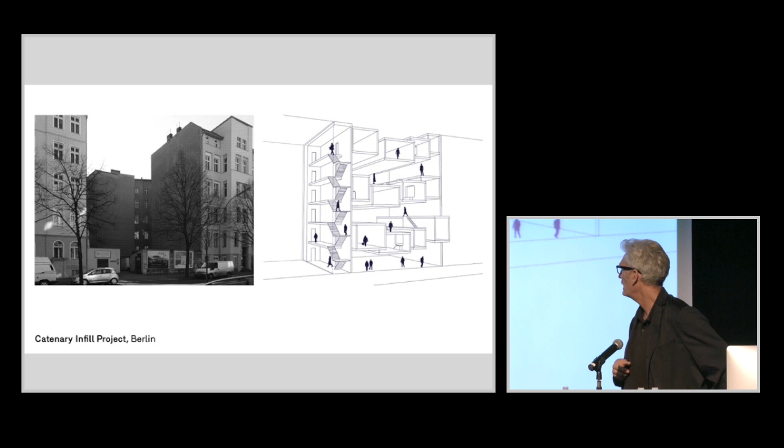So one of our ideas for these Baulücken—these are sites that were left, where buildings were destroyed during World War II. There's many of these pockets in Berlin that are still available. And the idea for this is a so-called catenary infill project.

Between the party walls, we would take these steel and timber tubes and then drop them into the site. They're catenary because they work like a chain, and by stepping that chain section structurally, it makes it stronger—also in a way that you could produce a work-live condition. So the tubes are apartments where you can live, and the space between them is a kind of workspace, on a work-live rhythm of one-two, one-two, one-two.

So the tubes are more cellular, and the spaces underneath them to the ground floor could be completely free, completely column-free. And then we were looking at facades a little bit like the Venice project, where you could just drop and wrap the facade over these kinds of projects.

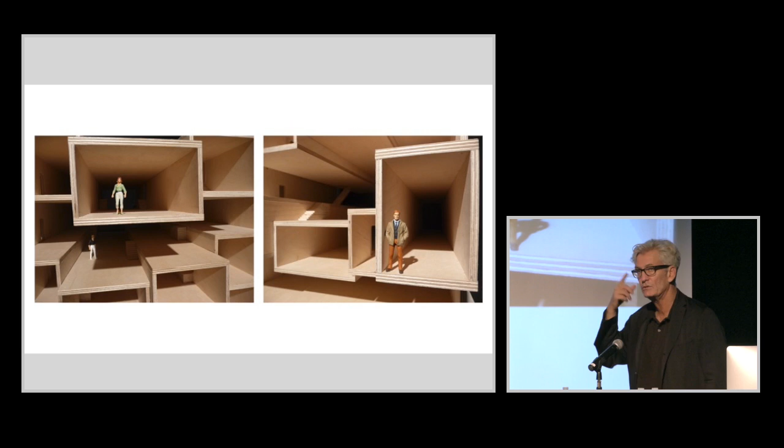So again, this exists as a prototype. We looked at 10 or 12 sites where this thing could get wider or narrower, taller or shorter, but the same structural logic would work for the setup of these kinds of projects. This is a self-initiated project without a client, but one where we could produce a module at that particular scale, because this idea of density in Berlin can operate at that scale, or at this scale.

So this is an idea for a tower which will be the highest building in Berlin. It's a hotel, also set up for housing, as a kind of ensemble of a tower, an office building, a Congress Center replacing the old one—which we're trying to turn into housing—and a parking structure on the left. The project will be a kind of gateway project.

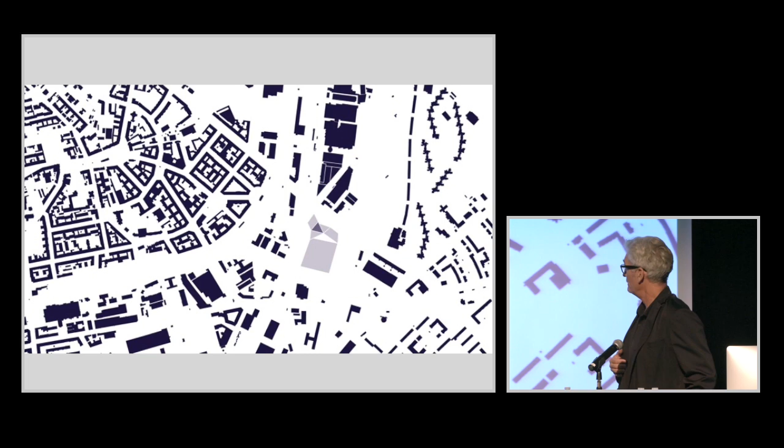To the right, about 10 kilometers away, will be the new airport whenever it's finished. And on the left, the 19th century fabric of Neukölln. So the building exists between those two conditions.

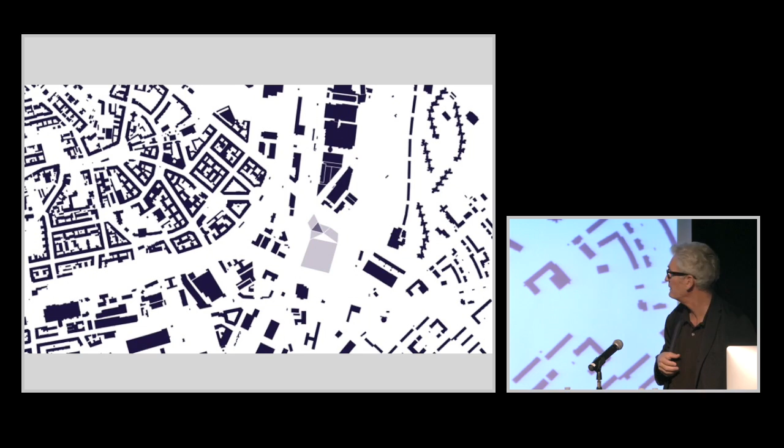We had lost a tower project three weeks earlier to Frank Gehry in Alexanderplatz. So in a way, this was the happy ending for us of that story, on a site that was not in the periphery, but also not in the center—somehow a site that allowed us to develop a project like this.

In terms of siting it, we were relating to the existing building on the left from the 90s. We were looking for a kind of system, a geometric system of assemblage. So we looked at the game Tangram, a children's game of triangulated forms, and looked at extruding them to different heights to produce this project.

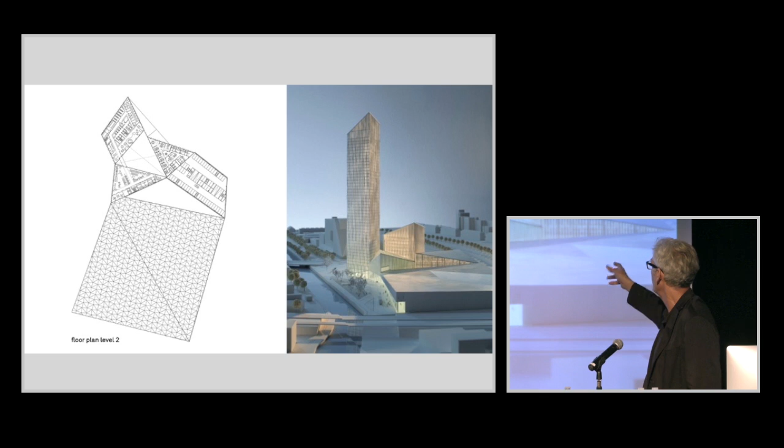It sits next to an industrial canal, has this kind of entrance space and a series of forms which collect to produce about one million square feet of housing, conference areas and offices in a plan like this, all orbiting around a triangle-shaped atrium, which is the center of the whole complex.

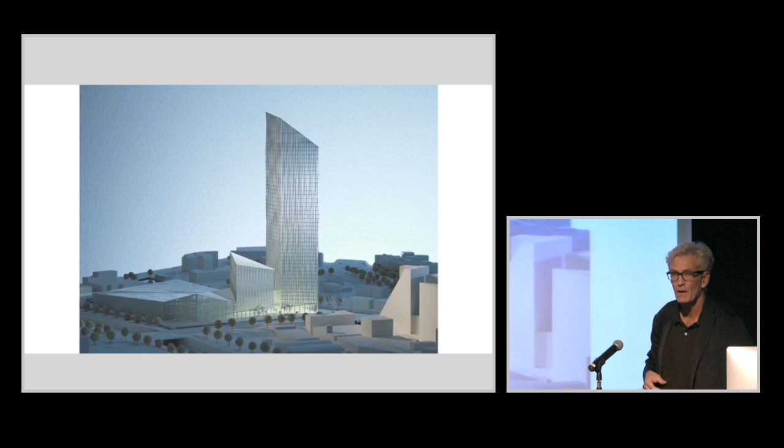It was funny, because Berlin is a city without a history of high-rise buildings, like Chicago or New York has. So in a way, this idea of density in a city like this is really based on opportunity and limits—where can you build, how can you build. Again, the site-specific aspect is how that could relate to it.

So we would never dream of generating a project like this in, say, Alexanderplatz, but because of the different constraints in a site like this, you could produce a building like this on this particular site.

Oh, I think that's the last slide anyway. The idea was to show you a kind of compressed version of the book, the Spielraum book, which you can get at Bill Stout's, and to show the work areas. The practice is really evolving, it really changes, but what I wanted to do is show you how we react to certain conditions and how those help us generate projects. Thank you so much.

Nice to be here. Well, that was incredible, Frank. Great stuff. I'm sure you guys have some questions, so I'll pass these around. Anybody?